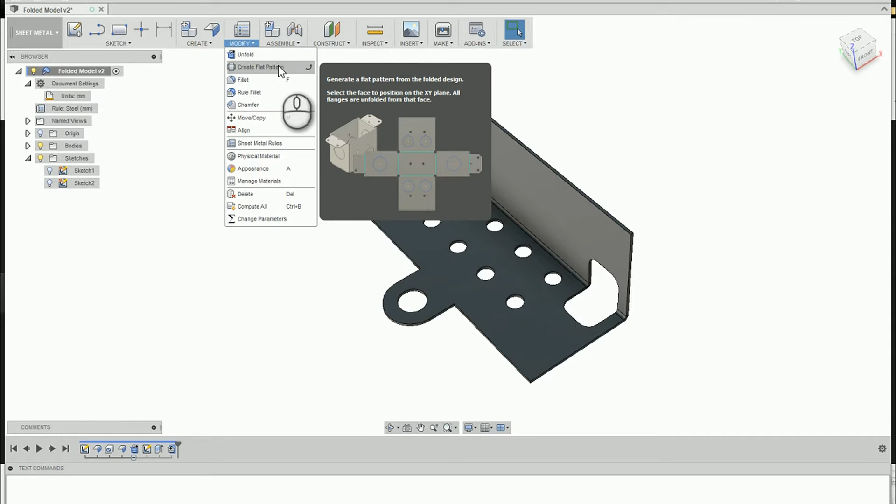So to do that, we'll go back to sheet metal. On the Modify tab, we'll go to Create Flat Pattern. Here it's going to ask you for a face to represent the stationary face, so I'm going to select that one there, say OK. There's our flat pattern, and so now you can see we have a flat pattern up here in our browser. If I was to say Exit Flat, that takes you back to the folded model. And then here, if you need to get back to the flat pattern, you just simply click that dot there.

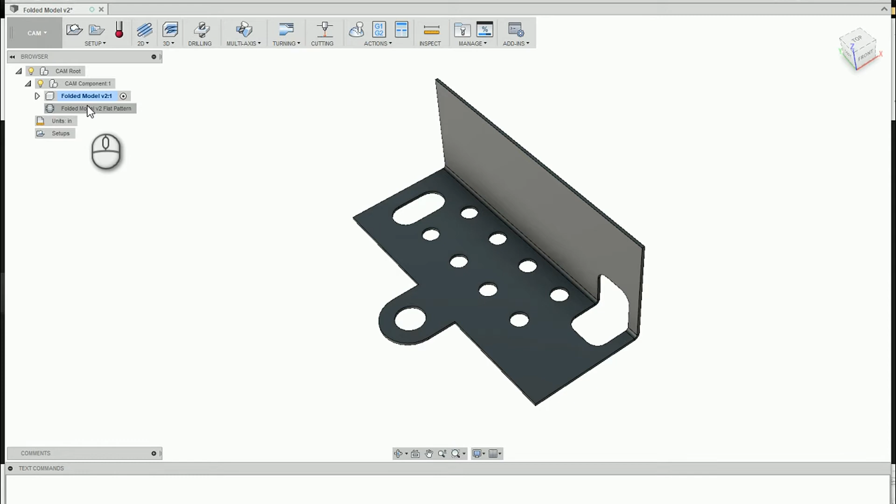So it's really easy to switch back and forth, and it doesn't matter which one you're in when you go to the CAM environment, because you have the ability, they did a really good job with this, to switch which version of the model you're going to be working with in the CAM environment also. So I'm just going to simply highlight down here, turn on the flat pattern, and now we're ready to start the setup. So I'm just going to do a setup here.

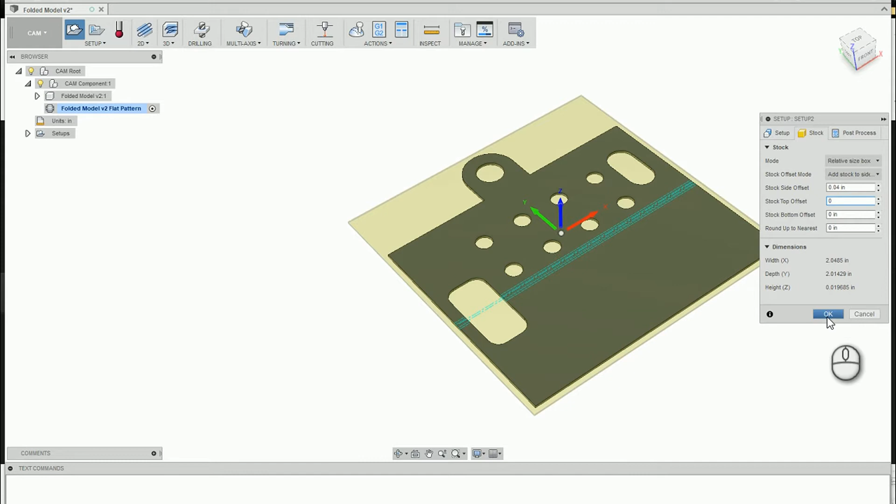We'll say cutting. We'll go to the stock tab. We'll just say no additional stock on the top and bottom. So I'm going to zero that out and say okay. We got a little bit of material around the outsides. Maybe I'll put a little bit extra in there. And then you can offset this from whichever side you want, depending on how you're going to set this up in your machine. So next we're going to go to cutting.

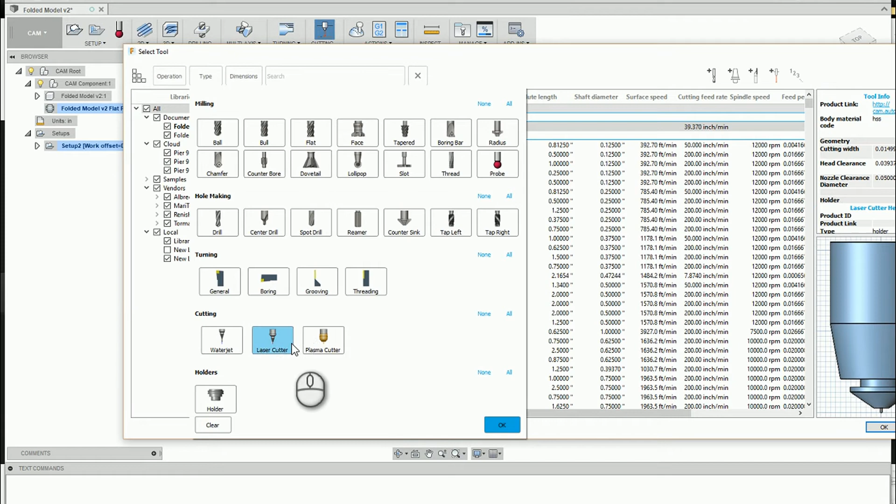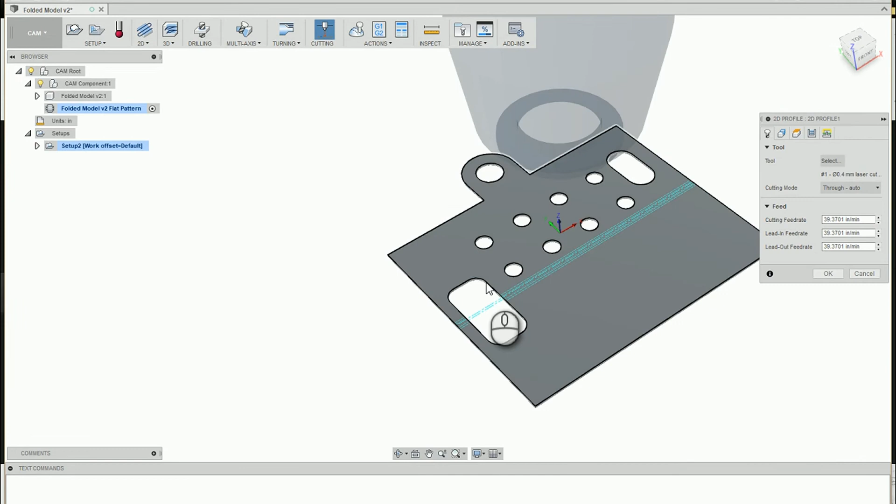And here I'm going to go to the tool library, and I'm just going to select all. And if you go to by type, you can come down to water jet, laser, plasma, or you can also do it by operation, and then you can see the cutting operation. And when you do that, it will find all the sample libraries for the ones that come with the software. So in here I'm working with the metric. I'm going to select this laser cutter, 0.4 millimeter laser cutter. Get that in the full screen there. Say OK. And then we can go to the geometry tab.

And if you guys can't see these tabs, it's a good idea to drag this out to where you can read them. That helps in training whenever you're trying to figure out which tab to go to. So here's the geometry tab, contour selection. You could go through and select individual contours, or you can actually just select that top face. That's going to find all of the contours on the top face of that part. Then you could say whether to start outside or inside. What do you want, loops, outer loops?

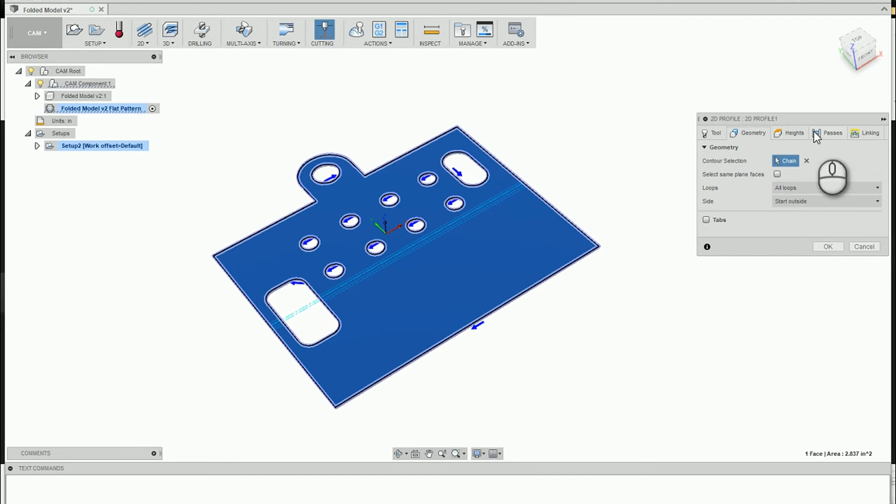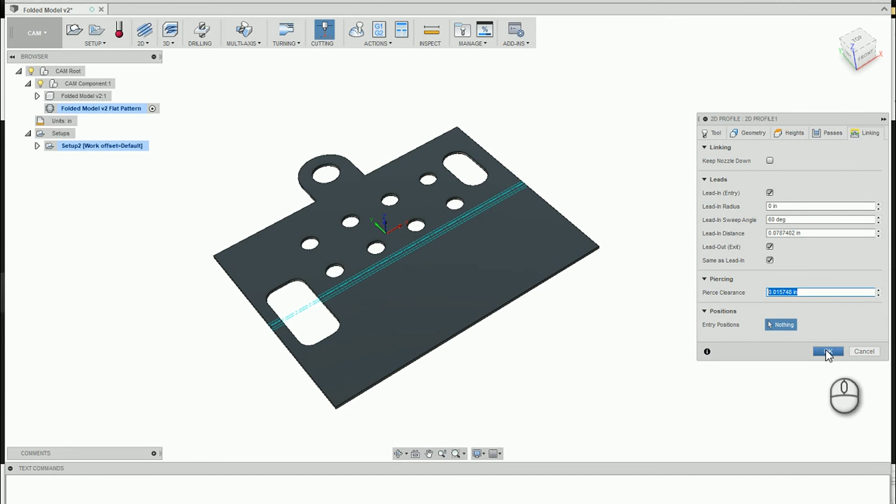The heights tab. Here you can see we're going from the retract height for a clearance height, stock top plus 200 thousandths for the retract, and then our top height is going right to the stock top, which is the top of the face, because those are both flush with each other. And then on the passes tab, you've got compensation. So if you need to turn on compensation there, you can do that. And then your linking tab, you have your lead in, lead out, and your pierce clearance value. So once you get all that set, you just say OK, and it will create our laser toolpath, and then you can simulate and post that code out.